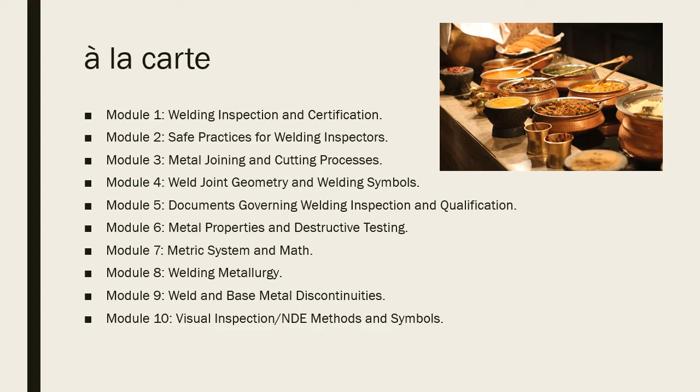Learning objectives. In this module, we're going to talk about compressed gas cylinder safety, handling of compressed gases, acetylene cylinder construction, proper storage of compressed gas cylinders, acetylene cylinder storage, manifolds, oxygen hazards, fuel gas fires, and common shielding gases.

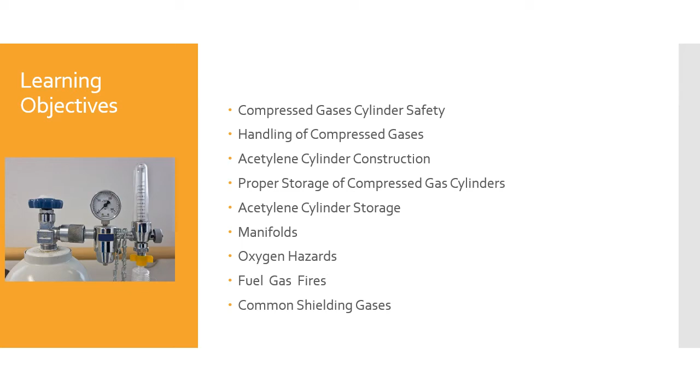We've all seen these compressed gas cylinders around the work sites or work areas. If you've had any amount of time with welding, you've dealt with compressed gases. That's why I'm saying everybody's seen these. They're also very dangerous if misused.

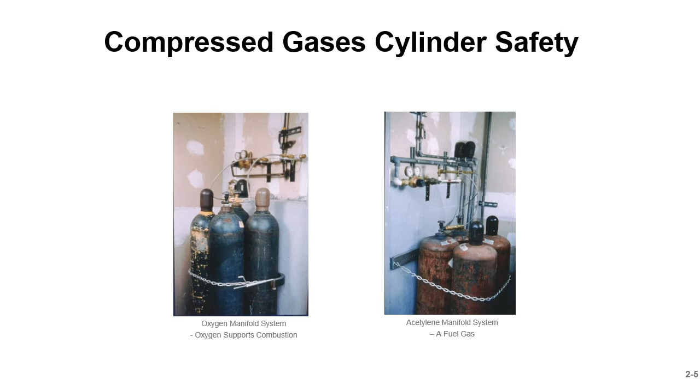I'm sure a lot of you have seen the Mythbusters episode where they launch a couple of these guys through a cinder block wall. So there's a tremendous amount of power in compressed gas that can turn one of these things into a rocket if not handled properly or if misused. So that's why we're going to go into compressed gas and cylinder safety for a few moments and have a little conversation on proper handling and care of gas cylinders and the safe practices that are involved with using these.

A typical oxygen cylinder is shown in figure 5-7. It is made of steel and has a capacity of 220 cubic feet at a pressure of 2000 psi and a temperature of 70 degrees F, 21C. Attached equipment provided by the oxygen supplier consists of an outlet valve, a removable metal cap for the protection of the valve, and a low melting point safety fuse plug and disc.

The cylinder is fabricated from a single plate of high-grade steel so that it will have no seams and is heat treated to achieve maximum strength. Because of their high pressure, oxygen cylinders undergo extensive testing prior to their release for work and must be periodically tested thereafter.

You can see there's a bronze valve on the top, a removable metal cap, a safety fuse plug and disc, pressed steel neck ring, oxygen capacity of the cylinder, 220 cubic feet at 2,000 pounds per square inch, pressure at 70 degrees F, water capacity approximately 2650 cubic inches. They're 8.5 inches ID, 51 inches tall, and a minimum wall of 0.260 inches.

So that's what a compressed gas cylinder looks like. A little different than the acetylene, but notice that it's very high pressure, 2000 psi. So if that bronze valve gets knocked off, this thing becomes a missile and it'll punch right through a concrete wall. There's a Mythbusters episode where they knock the lid off one of these and shoot it through a cinder block wall.

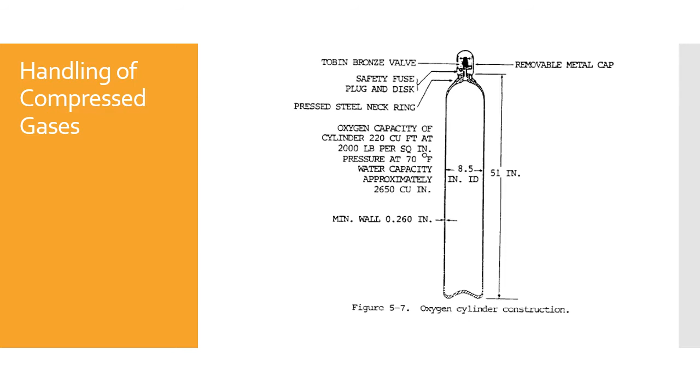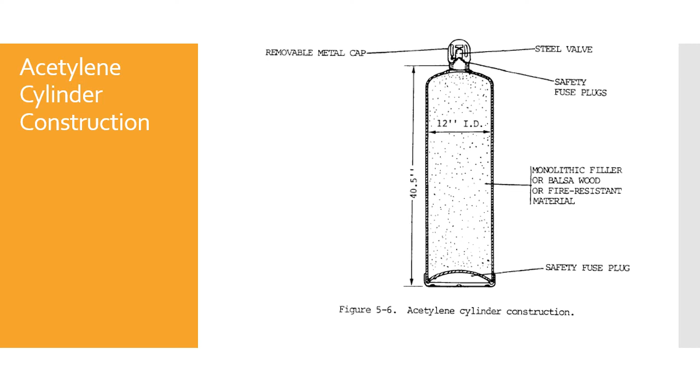Acetylene is a colorless, flammable gas composed of carbon and hydrogen, manufactured by the reaction of water and calcium carbide. It is slightly lighter than air. Acetylene burns in the air with an intensely hot, yellow, luminous, smoky flame.

Employers are responsible for safe use of compressed gas cylinders and liquid containers and their contents. Compressed gas hazards include oxygen displacement, explosion, and toxic effects, as well as the physical hazards of a ruptured cylinder. Employers must evaluate compressed gas hazards and have an emergency response plan that defines procedures and responsibilities to address emergencies. OSHA fact sheet on compressed gas safety.

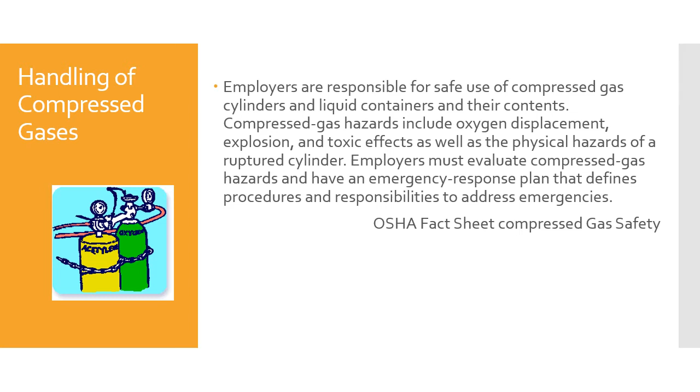Handling of compressed gases. Cylinders must not be used as work rests or rollers. Cylinders may be filled only with the permission of the owner, and should be filled only by a recognized gas supplier or those with the proper training and facilities to do so. Welding must not be performed on gas cylinders. Cylinders must not be allowed to become part of an electrical circuit because arcing may result.

Cylinders containing shielding gases used in conjunction with arc welding must not be grounded. Electrode holders, welding torches, cables, hoses, and tools should not be stored on gas cylinders. This is to avoid arcing or interference with valve operation. Arc damaged cylinders may rupture and result in injury or death.

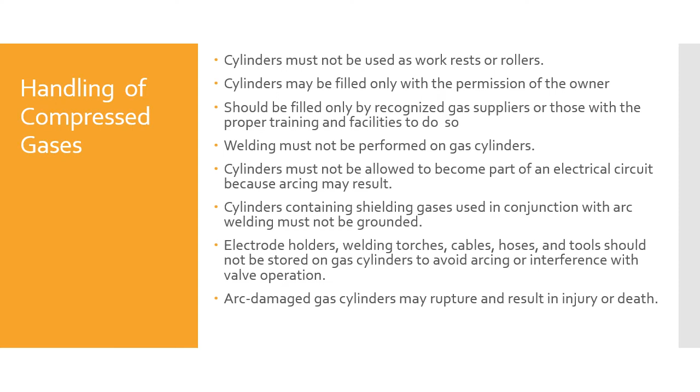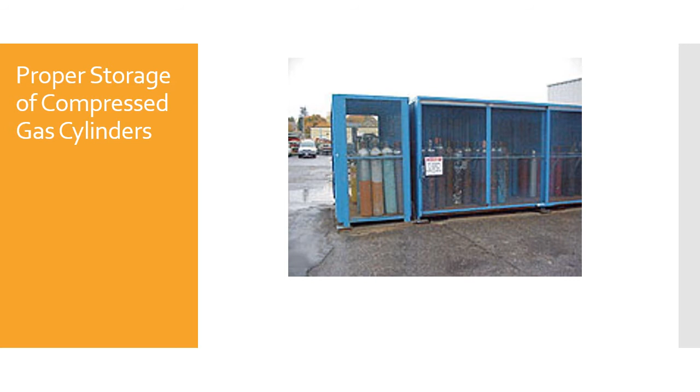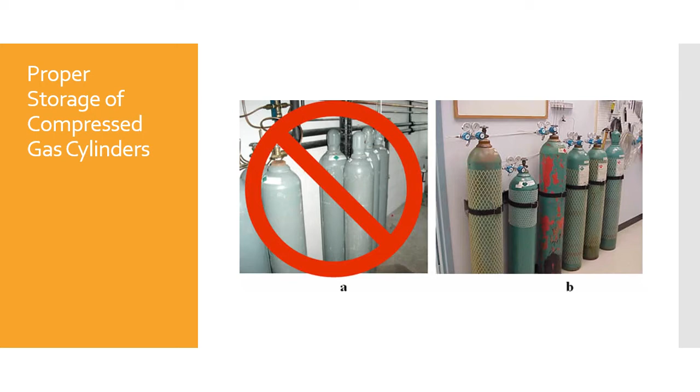On the right is the correct way, and on the left is the not correct way, as evidenced by the red circle with the slash through it, universal sign for don't do this. Cylinders must not be hoisted using ordinary slings or chains. A proper cradle or a cradle sling that securely retains the cylinder should be used.

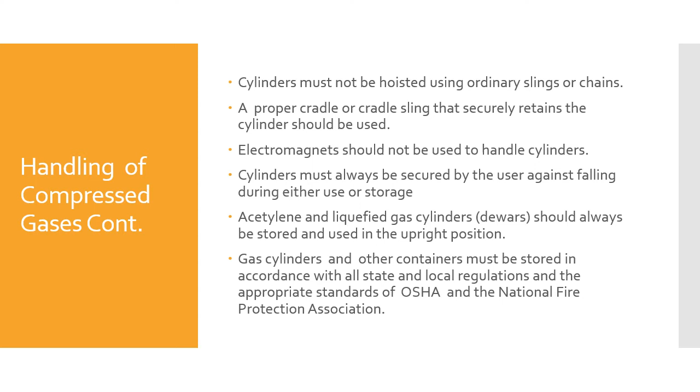Electromagnets should not be used to handle cylinders. Cylinders must always be secured by the user against falling during either use or storage. Acetylene and liquefied gas cylinders, dewars, should always be stored and used in the upright position. Gas cylinders and other containers must be stored in accordance with all state and local regulations and the appropriate standards of OSHA and the National Fire Protection Association.

Acetylene cylinder storage. Under no circumstances should acetylene cylinders be positioned or stored in other than an upright position. Storage of the cylinder in a horizontal or reclining position could create a hazardous condition. Acetylene stored in a free state under pressure greater than 15 psi can break down from heat or shock and possibly explode. Under pressure of 29.4 psi, acetylene becomes self-explosive and a slight shock can cause it to explode spontaneously.

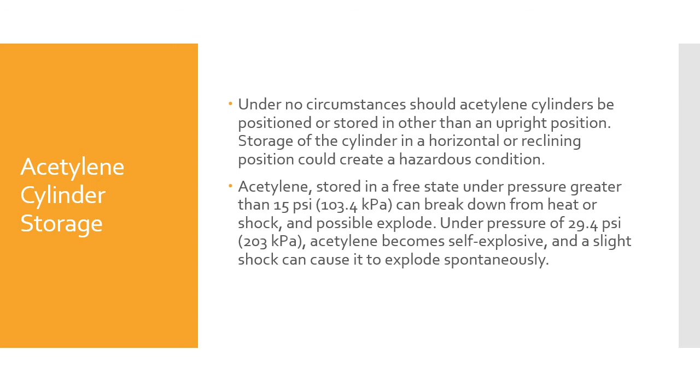This is why we do not store acetylene cylinders in the horizontal position, only in the upright position. Anything higher than 15 psi is bad, and under pressure of 29.4 psi, the acetylene becomes self-explosive. That is not a good thing. So, like I said, always store acetylene cylinders in the upright position.

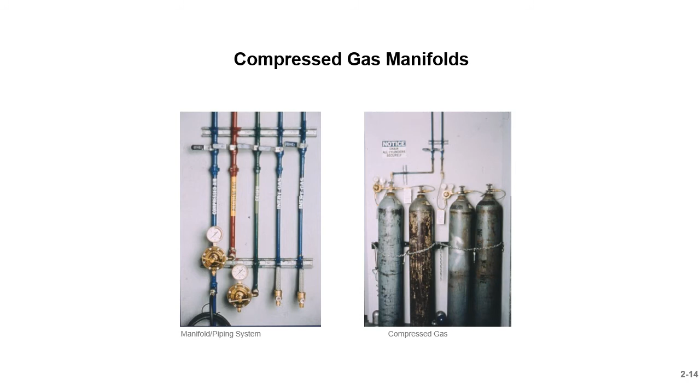Compressed gas manifolds. We're going to take a look at manifold systems. Manifolds are used if you use way more gas than you can get out of a single bottle. If you got 50 welders and you're sick of buying bottles, then sometimes you can set up a manifold system or a bulk system. But we're going to talk about manifolds for a couple of slides. A manifold is the supply of welding gases when a volume of gas is needed at a higher volume than can be provided from a single cylinder.

A welding gas manifold must be designed for the specific gas and operating pressure and be leak tight. Oxygen and fuel gas manifolds must meet specific design and safety requirements. Manifold piping systems must contain an appropriate overpressure relief valve. Each fuel gas cylinder branch line should incorporate a backflow check valve and a flash arrestor. Backflow check valves also must be installed in each line in each station outlet where fuel gas and oxygen are provided for welding, cutting, or preheating torches.

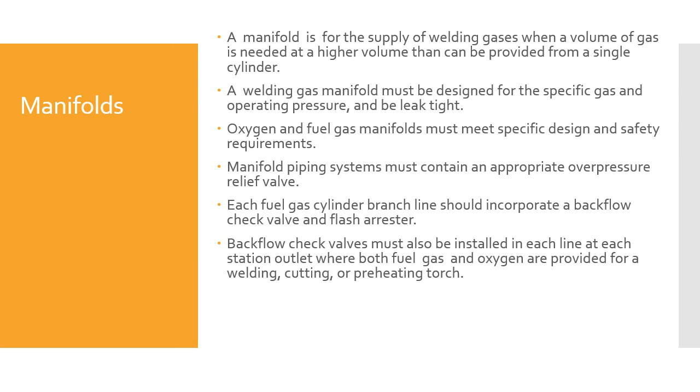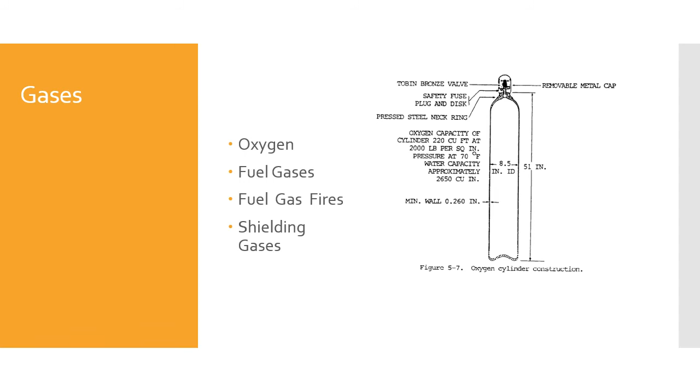We're going to talk about gases, and not the compressed portion, but we're going to talk about oxygen, fuel gases, fuel gas fires, and shielding gases for a minute. Oxygen is our friend. Oxygen is what we breathe. Without oxygen, we're in trouble. But compressed oxygen and pure oxygen... air is 78% nitrogen. Most of the air we breathe is nitrogen. And there's a 20% plus or minus component of oxygen in the air that we breathe. So we're not breathing pure oxygen.

Pure oxygen will catch stuff on fire in a big way. You put oxygen with just about anything and it's an explosion. So do not permit oil or grease to come in contact with compressed oxygen gases. Explosion may occur. Separate oxygen cylinders from those containing flammable gases by a minimum distance of 20 feet or by a non-combustible partition extending not less than 18 inches above and to the sides of the stored material.

Never store oxygen cylinders near flammable solvents, combustible materials, unprotected electrical connections, or ignition or heat sources. Yeah, bad things will happen if you expose it to pure oxygen. Shoe polish, like in the military. Certain people don't have to polish their shoes in the military because they're dealing with pure oxygen and their boots will catch on fire. So they are prohibited from using shoe polish on their boots. So oxygen, you need to just be careful with it, especially when there's combustibles around, because it's just going to be a bad thing.

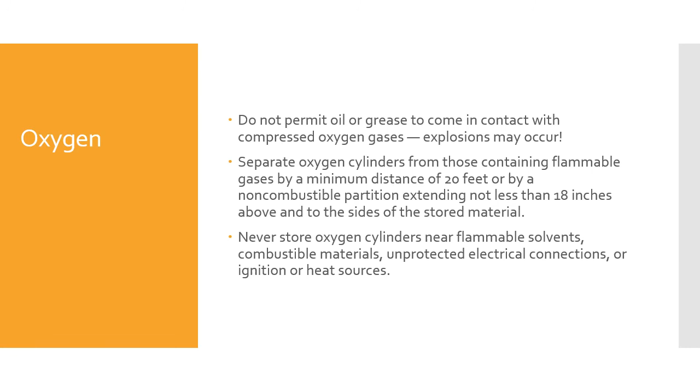Explosions. Oxygen hazards. Oxygen is slightly heavier than air, vapor-specific gravity 1.10. Pure oxygen can be very reactive. Systems must be properly designed, cleaned, maintained and operated. Use no oil. Oxygen cleaned stickers should be applied to things.

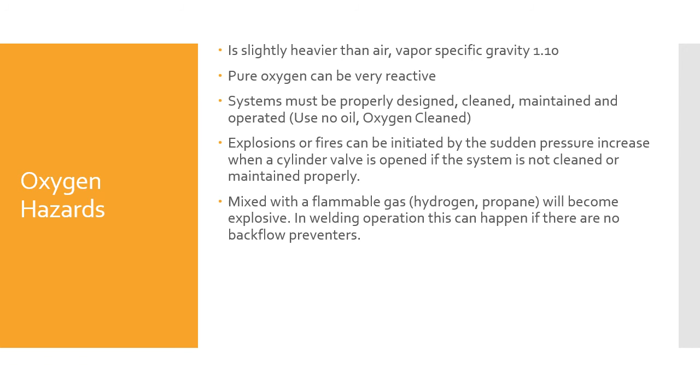Explosions or fires can be initiated by the sudden pressure increase when a cylinder valve is opened if the system is not cleaned or properly maintained. Mixed with a flammable gas, hydrogen, propane, acetylene, this will become explosive, and in welding operations, this can happen if there is no backflow preventer.

Fuel gas fires. In a fire situation, there are special precautions that should be taken for acetylene cylinders. All acetylene cylinders are equipped with one or more safety relief devices filled with a low melting point metal. This fusible metal melts at about the boiling point of water. If a fire occurs on or near the acetylene cylinder, the fuse plug will melt. The escaping acetylene may be ignited and will burn with a roaring sound.

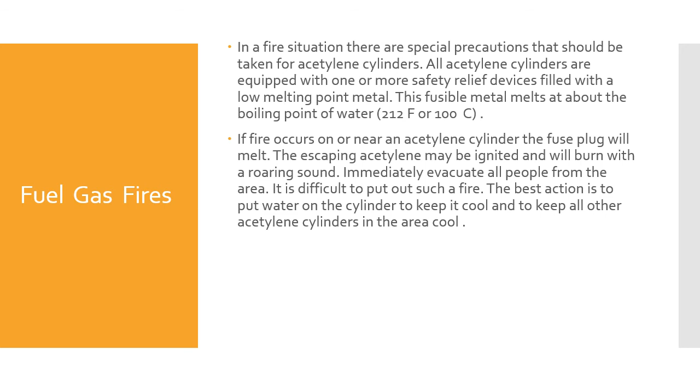Immediately evacuate all people from the area. It is difficult to put out such a fire. The best action is to put water on the cylinder to keep it cool and keep all other acetylene cylinders in the area cool. This isn't for you to do, but this is for the fire people, the fire department, which hopefully by this point you have called. The firefighting personnel may attempt to remove the burning cylinder from close proximity to other acetylene cylinders, also from flammable or hazardous materials or from combustible buildings.

It is best to allow the gas to burn rather than to allow the acetylene to escape, mix with air, and possibly explode. So you're better off just having the acetylene escape and burn as opposed to escape and explode.

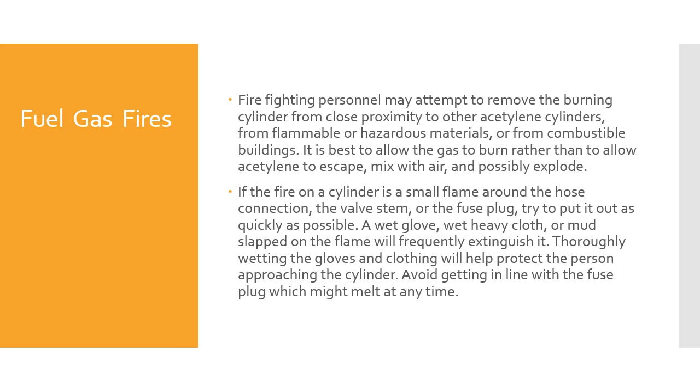If the fire on a cylinder is a small flame around a hose connection or the valve stem or the fuse plug, try to put it out as quickly as possible. A wet glove, a wet heavy cloth, or mud slapped on the flame will frequently extinguish it. Thoroughly wetting the gloves and clothing will help protect the person approaching the cylinder. Avoid getting in line with the fuse plug, which might melt away at any time.

Common shielding gases, argon and helium, they're both inert. Nitrogen, carbon dioxide are reactive. They're odorless, colorless, and can displace oxygen. Gases denser than air collect in tank bottoms, vessels, pits, and other low-lying areas. In very still air conditions, the denser gases, argon, can act almost like a liquid and will form dense, low-lying layers which will disperse only slowly. Lighter gases may collect in high-level spaces, which could pose a risk if this is at head level. So just be careful with shielding gases.

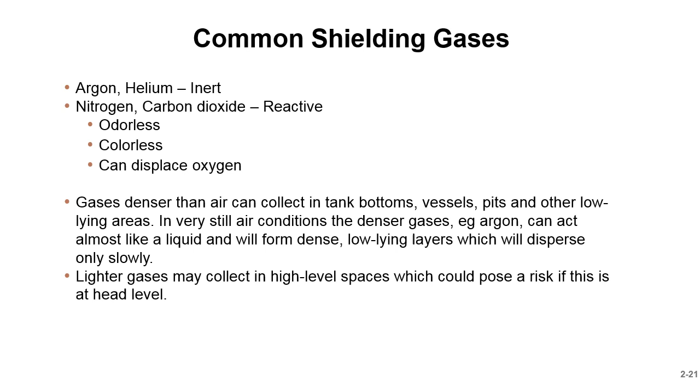Every year there's some OSHA notices that come out and tell you about some horrible accident that happened with shielding gases, where 14 bottles of argon were released into a tank and killed 3 welders or whatever. There's always something like that you hear about. So these are things you need to be cognizant of as a weld inspector, because you might be going into one of these spaces.

In this module, we covered compressed gas cylinder safety, handling of compressed gases, acetylene cylinder construction, proper storage of compressed gas cylinders, acetylene cylinder storage, manifolds, oxygen hazards, fuel gas fires, and common shielding gases. These are all things that you're going to come in contact with being a weld inspector. Welding involves compressed gases, either for shielding gas, as an oxidizer with oxygen, or fuel with acetylene, propane, and other compressed gases. So you need to be cognizant of some of the dangers that are out there with these things.

I mean, it's a proven way to be able to transport compressed gases from one place to the other in these cylinders. But there is also the inherent danger, because these things are basically a big bomb waiting to go off, because of all that stored energy from the compressed gas. So there's a lot of things that can go wrong. Generally, they don't if you're watching what's going on, or the people that are handling or dealing with the gases know what's going on. But there is an inherent danger with these gases and gas cylinders, either for fire, explosion, a projectile situation if one of these falls over and the valve gets knocked off,